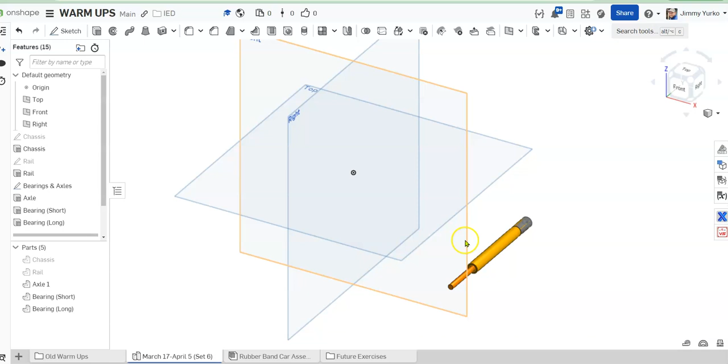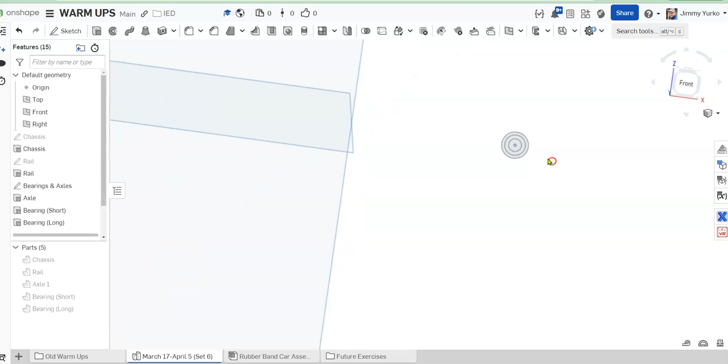Today we're going to make these three components: a bearing, another bearing, and an axle. And we're going to make all three of those parts from this one sketch. So I'm going to demonstrate how we can do that today, rather quickly and easily. Without further ado, let's get started.

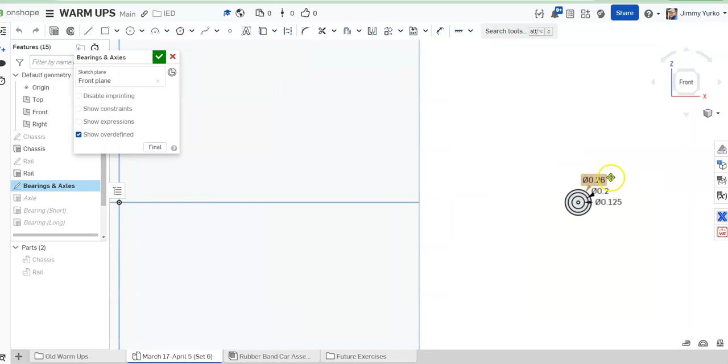First of all, go ahead and create yourself a sketch on the front plane. Call it bearings and axles, or axles and bearings, or whatever you like. I like bearings and axles. What we're going to add to this sketch is three components. We're going to draw three circles.

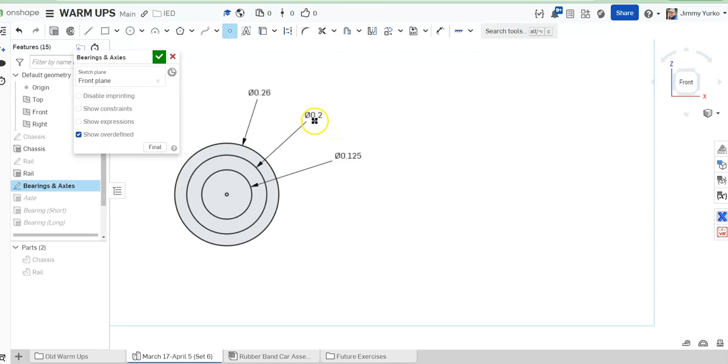We're going to make them on the origin. The first circle will have a diameter of 1/8 of an inch. The second circle will have a diameter of 2/10 of an inch, and the last circle, the largest one, will have a diameter of 26/100 of an inch. Let's go over to our origin and draw those circles.

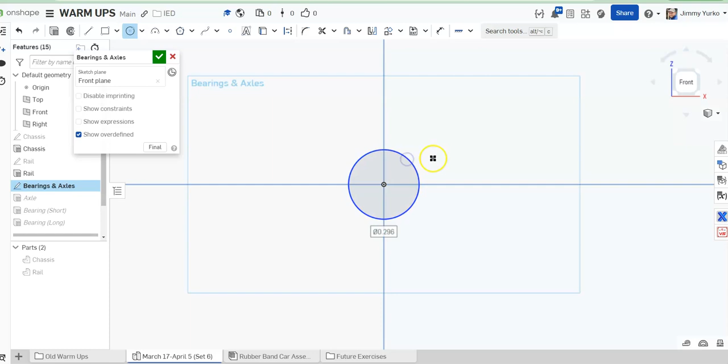Let's tap the C key to get my circle tool, or click it from the tool ribbon, and click on my origin, click and release, type in 1/8. There you go. Second circle from the origin, click and release, type in a value, 2/10. Third circle from the origin, value 26/100.

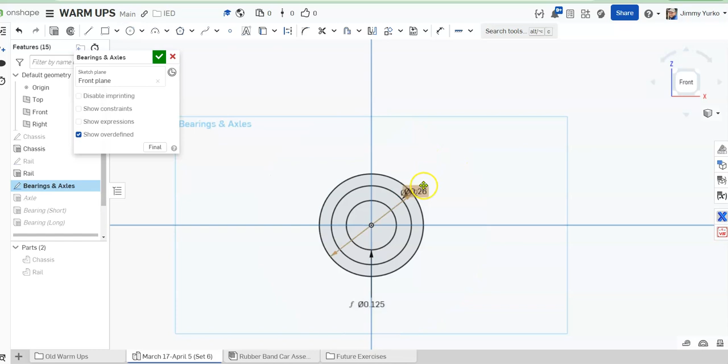Drag my dimensions into neat places so it's easy to read, and when you're happy with everything, save your sketch.

I'm now taking my planes off because that's annoying me. Now I'm going to zoom in on the area. Remember, if you want to zoom to an area, the quick way is to hit the zoom window button, the W key on your keyboard, drag the bounding box over, and that'll zoom into the selected area.

Next thing we're going to do is get our extrude tool, choose the centermost circle, and we're going to extrude that to the depth of our axle. The axle length in our instructions tells us 3.5 inches, and that's our axle.

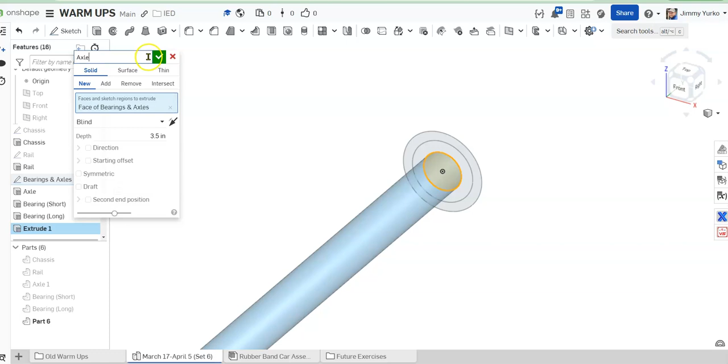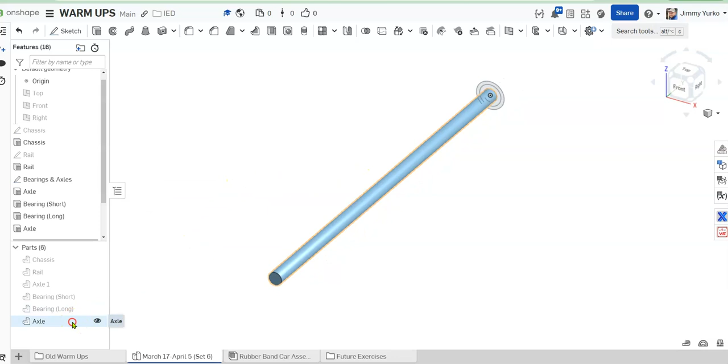We'll hit the green check, and there's your axle. We'll go ahead and name that axle, and give it some material properties. We'll assign the material poplar, because that's the closest wood to what I'm actually going to be using, and give it a color—let's go with that straw color. And we're going to hide it for now.

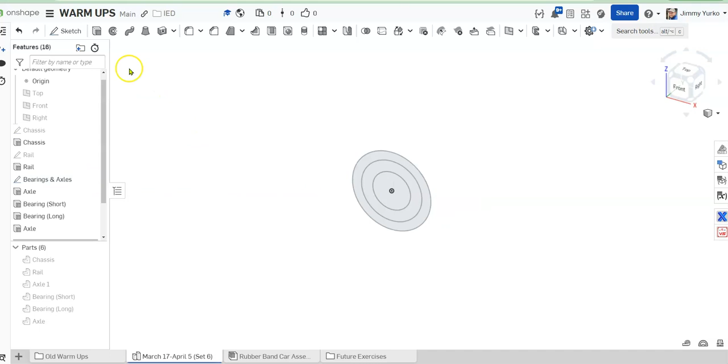Now, when you typically do an extrusion, your sketch will be hidden afterward, so just hit the eyeball to turn it back on. Now we're going to repeat that process. We hit the extrude button, and we're going to get the outermost pair of circles.

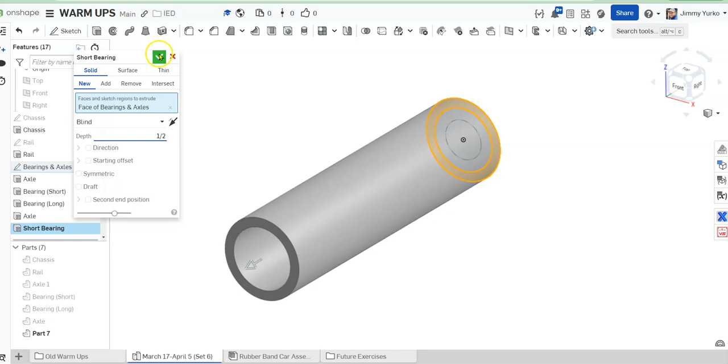The outermost pair of circles is going to give us our short bearing. We'll call that our short bearing, and that's a solid, a new part. It's going to be on that face. It's blind, giving it a distance of a 1/2 inch. Check, and there you have it—new part's been applied.

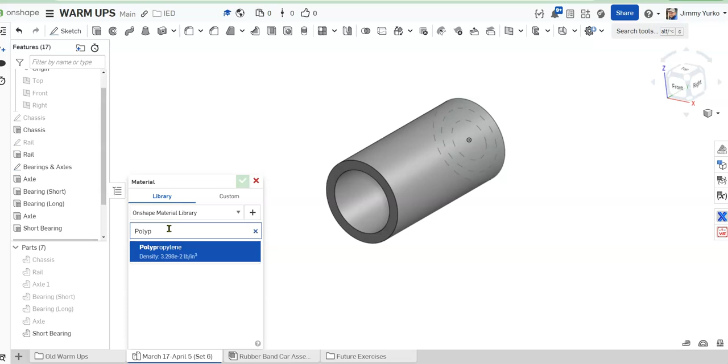There's your short bearing. Let's right click on that and rename it short bearing. Let's assign a material—instructions tell us to use polypropylene. Assign that material, and then we can hide that. At this point our sketch should still be on, but if it turned off, just poke it in the eye.

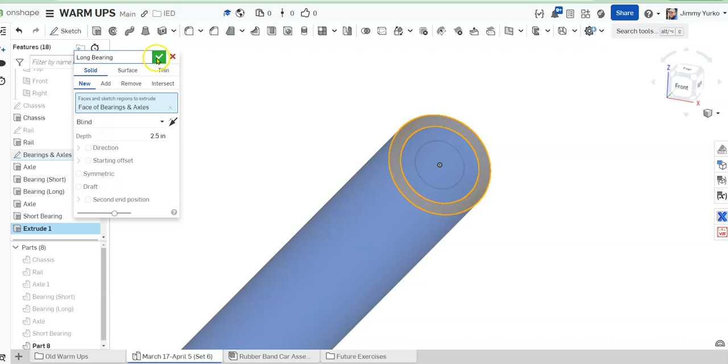Let's go ahead and do that long bearing. So we're going to extrude, going back to the exact same space. This time the extrusion is 2.5 inches in length or depth, and this is our long bearing. How do I spell it correctly? Okay, you can see our part has appeared down here at the bottom, so let's give it a name.

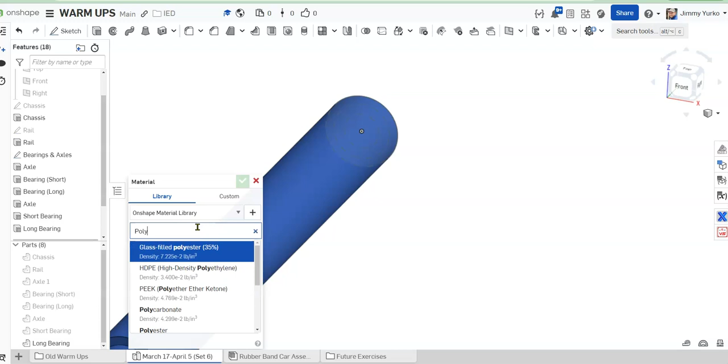We're going to assign a material—again, just like the last bearing, we're using polypropylene. And there it is, there are our three parts: our axle, our short bearing, and our long bearing, and they're kind of running into each other.

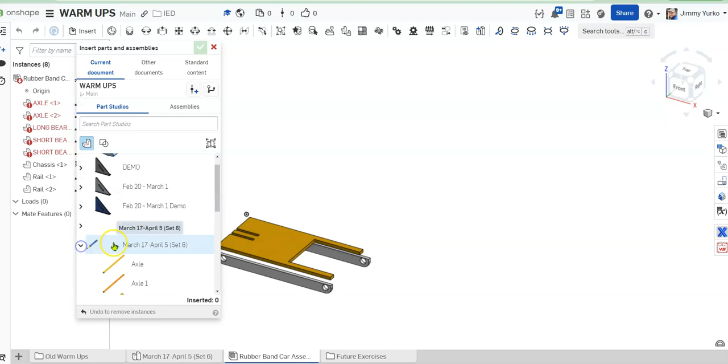But we don't care about that, because what we're going to do is bring those over into an assembly, hit the insert button, and pull them in one at a time anyway. So it really doesn't matter where they're placed. I'm going to grab that long bearing, put it in there—we'll get to that later, don't worry about that part. Today, just focus on getting those pieces made.